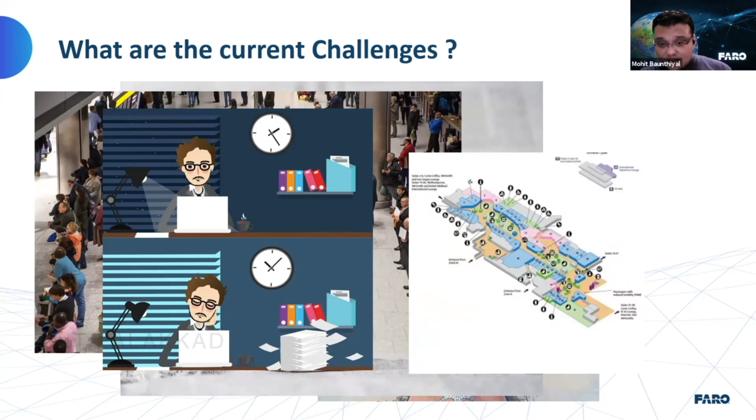Not only that, as I mentioned, the complexity of the site. Usually we had simple buildings in the old times, but nowadays a complex air conditioning system could be there. There can be a water filtration plant. Let's take an example of an airport itself. There could be a terminal building, complex HVAC or ducting going on all around the area. So the complexity of the site is becoming much more challenging in the current construction industry.

The cost of construction waste is one of the big challenges. In fact, we have seen in most cases that 30% of the cost increment of a project is mainly because of construction waste. We have seen areas where the inventory has not been done correctly, and as a result most of the material has been piled up on the site, which can increase construction waste because you don't have any proper documentation of the site.

And whenever you need any element or object from that area, you may be chasing around all the places: where is that part, or where is that component? It can be a beam, some other structural element, or some other feature which may not be correctly inventoried or recorded in the initial time.

Then we have the rework, and I think this is one of the challenges. In the traditional or conventional method, we used to do the initial survey by tape measurements, or with some raw or sketchy drawings of the site. Then based on those measurements, we used to convert it into a 3D model.

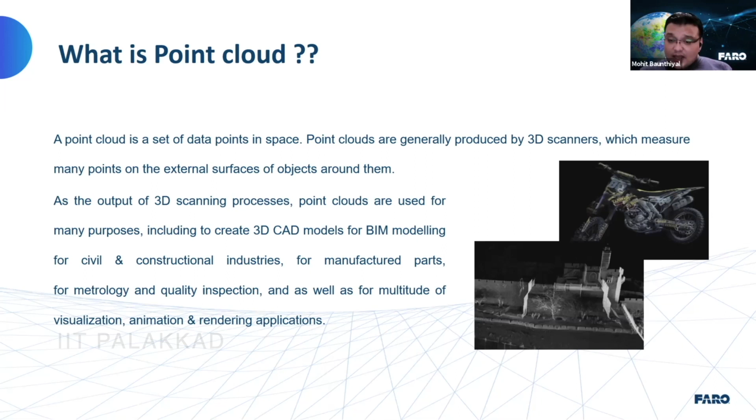So if I talk about the bigger picture, point clouds can be used across all disciplines. We have people from the movie industry, the gaming industry, construction, civil, plant, or oil and gas. So we have various disciplines where this data can be used as per their own requirements.

I have a quick video which I would like to show you, and in this video you can see and relate to the term point cloud data and how a point cloud looks. This video was captured by one of our active users who keeps doing laser scanning on site. Right now on the screen, I think you can see the video. This data has been captured from a heritage site where they wanted to document the complete site information with the help of a laser scanner.

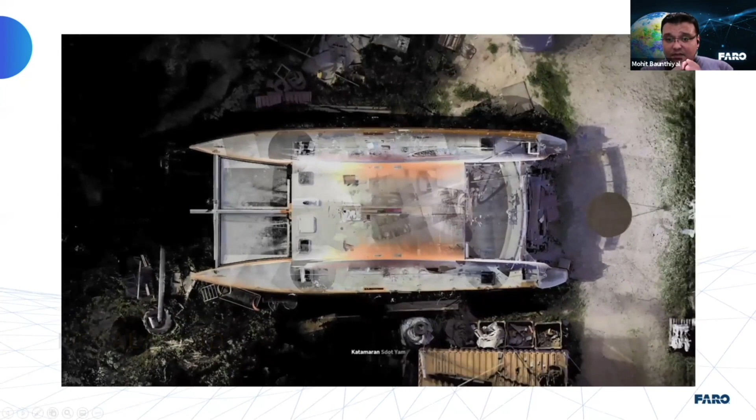They have been scanning not only in the construction environment, but also in forests, on a rail track or a rail station. They have been scanning tunnels to extract the tunnel profile, using the scanner to capture mosaics or paintings, building spaces. We also have plants, heritage, foods. So all this data which you are seeing on the screen is nothing but millions of points captured from the site, which have been stitched together to make a complete 3D geometry.

So right now you can see we have cases from the police department, like a burned bus or maybe an accident scenario. We have piping. The complete piping can be scanned with the help of the device, so if you want to make a complete as-built piping for, let's say, your buildings, your plant, or maybe the interior of a ship as well.

So we can also use the same laser scanning technology, and that can collect all this point cloud data from the site, and later on it can be used for 3D modeling, reverse engineering, QA/QC, and even for the visual representation or for the digitalization of the data itself.

So the scanning or the point cloud can be of a small component or a small object, and it can even be up to a large area such as a complete city, where you can do the scanning with the help of these devices. So I hope this video helps you to understand the term point cloud data and how it actually looks on the site itself.

So before proceeding to my next slide, I believe the point cloud may have given you a clear idea of what exactly point clouds are. And now, as I mentioned, the point cloud data has been captured with the help of a 3D laser scanner. So the next question could be, okay, what exactly is a 3D laser scanner?

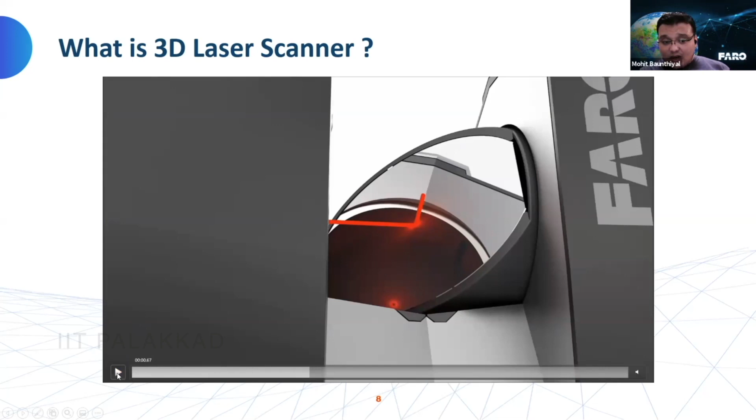The moment we start scanning, the laser starts emitting and strikes the mirror head, which is situated at the center of the scanner. Once it strikes the mirror head, it starts reflecting outwards to capture the surroundings. Now, the moment it hits the surface, it comes back and collects the XYZ information.

It's actually similar to what we have seen with other devices, like a distance meter, where you take out a distance meter, strike a point on the surface, and it shows you the distance between the object and the position where you are standing. Similar to that, we have the same technology. The same laser strikes the surface and comes back to the scanner along with the XYZ as well as the color information.

But the major comparison between both technologies is that with a distance meter or even with a total station, you are only able to capture a single point at a time, whereas with this device you are capturing nearly 2 million points per second. As you can see, the device is not only emitting the laser in one direction, it's rotating on both axes, horizontally as well as vertically.

And if I talk about the measurement speed of the device, it's a 2 million points per second measurement speed. As a result, the data you capture even with a single scan is going to be enormous compared with the traditional or conventional method. So that's why we keep saying that with laser scanners, we are looking at a fast device to capture the site information. Okay.

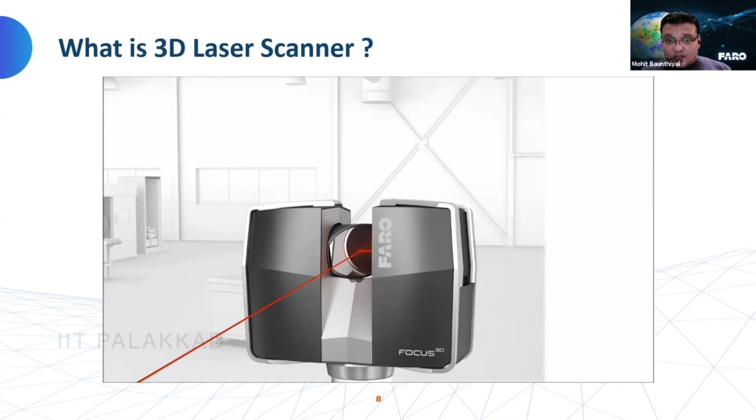And while proceeding with the same, again, there are two different types of laser scanners which are right now available in the market. And in fact, I think one of the common terms which you may have also heard about is LiDAR. So we actually work on the same principle of LiDAR, where a laser source emits a laser, it comes back and collects the information. Now, the only difference is that LiDAR usually works in a single direction. So we do have a beam which can work in a single direction.

Now, it can be a single-beam LiDAR or it can be a multi-beam LiDAR. But when we talk about a laser scanner, a laser scanner can actually do the scanning of the complete 360 environment in one go. So that makes it different. But if I talk about the fundamentals or the technology aspect, they are both actually the same.

When we talk about the time of flight laser scanner, it simply emits a laser, it comes back and collects the information; the time taken for the laser to travel is documented, and as a result, we have calculated the distance. Whereas in the case of phase shift, we are also calculating the medium in which the laser is traveling. And as a result, when it comes back, we have more precise information of the site itself.

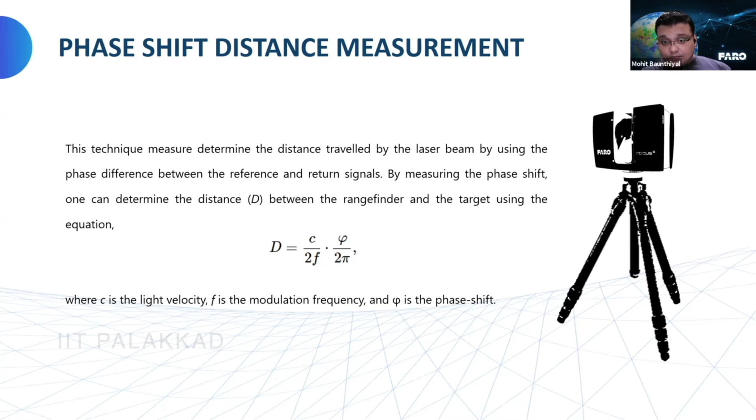Since we have started with the laser scanner, I'll also go quickly through the history of the laser scanner. Laser scanners are actually not new in the industry. Laser scanners started being used somewhere in the 1990s. And I think one of the first founders of this technology is Ben Kacyra. He's from Cyra Technologies, who made the world's first laser scanner.

And after a few years, that scanner was actually made available for the users. At that time, he was mostly using these technologies for documenting large spaces for heritage and even for heritage evaluation. In fact, if you want to read the stories about Ben Kacyra, you can see that earlier he used to do laser scanning development, but now he's totally into heritage and preservation work.

And he's actually one of the founders of the CyArk organization. CyArk is the one who has taken the initiative of scanning 500 heritage monuments across the world. And they have actually done a phenomenal job documenting all of the 500 sites.

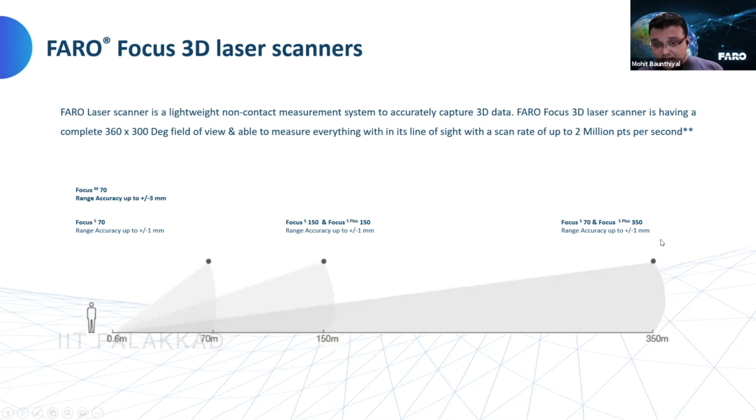We also have a 2D mobile mapping system. Similar to what you may have seen as a distance meter, we have this ScanPlan device, which is basically a 2D mobile mapping system. You just need to hold the device in your hand and start walking around your area or site. The moment you start walking, it starts creating a 2D drawing on the screen, which can be your mobile phone. At the same time, you get a real-time preview of the complete lines, the sketches, or the wall information on the site itself.

Then we have the handheld laser scanner as well. The Faro Freestyle 2 is the handheld laser scanning segment, where you can do close range laser scanning on the site, and the object can be scanned with the help of this handheld device. These devices have their own accuracies and their own objectives. The handheld laser scanner is used in complex environments where a terrestrial or tripod-based scanner cannot be placed. So in those tight spaces, you can do the scanning with this handheld device.

Now, with the handheld device, the accuracy is around 0.5 mm, and it varies according to the distance at which we are capturing the data. The accuracy can be 0.5 mm if I'm standing at a distance of 1 meter. If I stand at a distance of 5 meters, the accuracy goes to around 5 mm. And the maximum capture distance is up to 10 meters, where the accuracy goes up to 15 mm. So depending on my need, I can adjust my distance and ensure my data accuracy accordingly on the site.

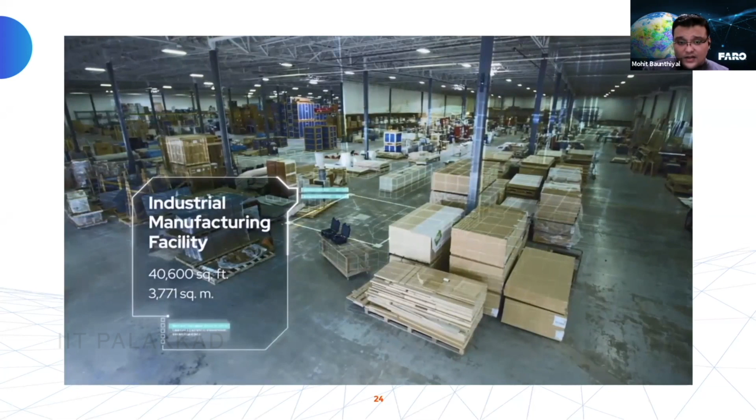I have a quick video in which I would like to show you the workflow of the Swift system. In this case, as you can see, we have this construction, a warehouse or plant, where we have been using the same Swift for capturing the complete data or the complete site information.

Sorry. Now for data capturing, what we simply need to do is plug all our devices into the location where they need to be placed. On the top you have the Focus 3D, below it you have the ScanPlan on top of a tripod, and at the bottom part we have the trolley system.

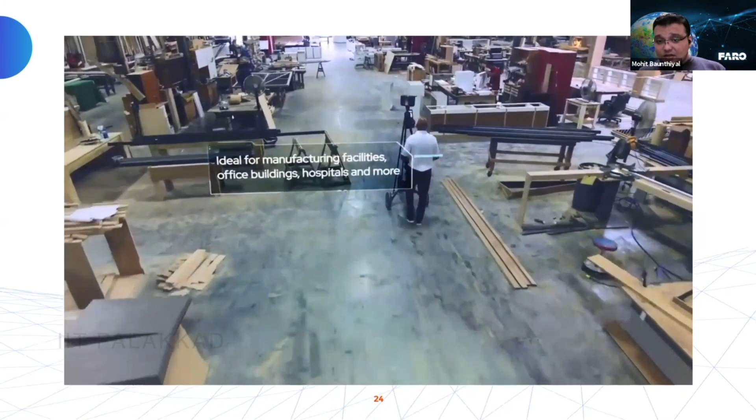The good part is that the FARO Focus Swift system offers you complete freedom of choice. When we say freedom of choice, as I mentioned, if you want quick data capturing, you can do it while moving the cart. If you want high-end accuracy, then you can go for a stationary scan. You can stop your cart and click on the device, so during the mobile scanning itself you can choose the stationary or high-end scan, and the data can be captured accordingly.

Now, to compare with the traditional scanning method, in this part you can see we have done about 24 scans at different positions in the tripod configuration, whereas in this case we are simply moving our trolley all around the area. So for the same site, we have taken about 24 scan positions, and each scan position has taken around 5 minutes.

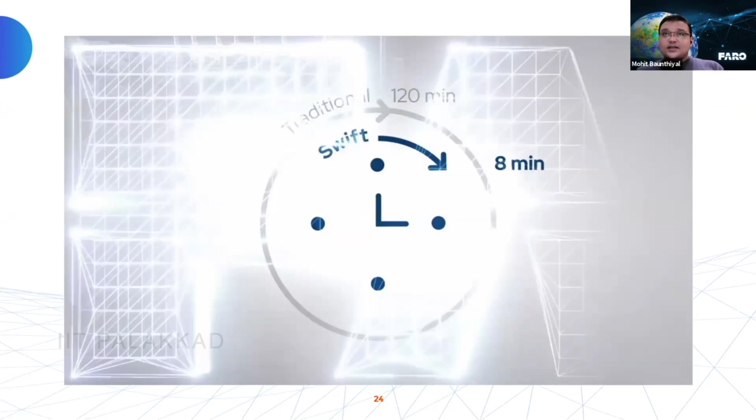In total, with the Swift system we spent about 8 minutes on data capturing, whereas with the traditional scanning system we spent about 120 minutes capturing the site information. So you can see this device is much faster compared with the traditional method. A user can choose at any point which configuration or which accuracy is needed for their project requirement, and use it accordingly at the site itself.

As I mentioned, in the Swift we have the same 3D laser scanner, the Focus S series or S Plus series laser scanner. Along with that, we have a firmware that simply needs to be enabled. All the scanners FARO provides have a Swift configuration, but to enable it, there is a firmware license which needs to be installed inside your scanner. Along with that, we have the ScanPlan and the mount where the ScanPlan is placed, and a mobile phone, which is used as a controller.

Any mobile phone, Android or iPhone, can be used. You are not using any specific app for this. We are simply accessing the Wi-Fi of the devices, and based on that Wi-Fi, we connect our mobile phone to be used as a controller for both of these devices. The good part is that the entire system is wire free. So you don't need to run cables and other things for capturing the data or for connecting with each other.

They all work within the Faro ecosystem, and they can all be interlinked together. In this case, the Focus 3D is connected with ScanPlan via Wi-Fi. At the same time, the user's mobile phone can also be connected with the ScanPlan. And this will keep on collecting the trajectory wherever I'm moving the cart.

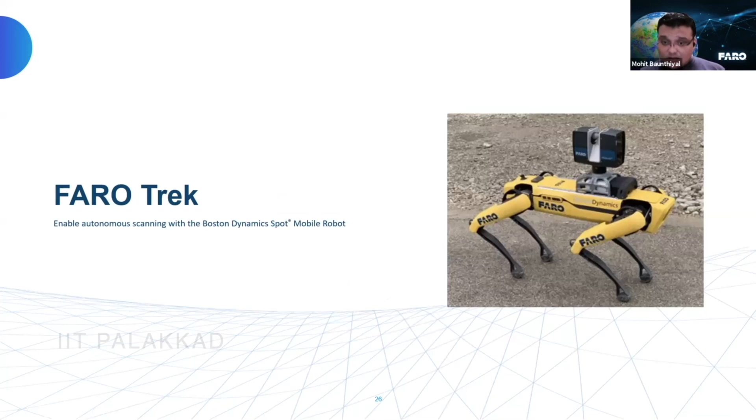The other system which we have is, as I mentioned, an autonomous laser scanning system. In this case, we have this product, the Faro Trek, which is a joint collaboration between Faro and Boston Dynamics. We have combined both of these technologies together, where the Boston Dynamics Spot can give us complete mobility, or the choice of using an autonomous laser scanning platform.

So we just need to feed in, let's say, the flight plan, similar to what we do with a drone, and that's it. Now the device will go to the site, do the data capturing and everything, and come back to us accordingly. Again, this is based on the requirement. If we have large or complex sites where there could be some hazard for the operator, or where human involvement need not be there, in those complex areas this device can go and do the scanning.

Now, the good part is that all the scans have been captured and aligned with respect to the trajectory where the Spot, the robotic platform, is moving. So as a result, we have stitched data, already pre-processed registered data. All the scans are already positioned in the location wherever they need to be.

The good part with the Spot is that it can actually climb stairs. So if there is any change in level, you don't need to shift your device. The Spot is intelligent enough to climb those stairs, reach another level, do the scanning, and then come back to you. So I have a quick video on the Spot as well. Let's have a look at the Spot.

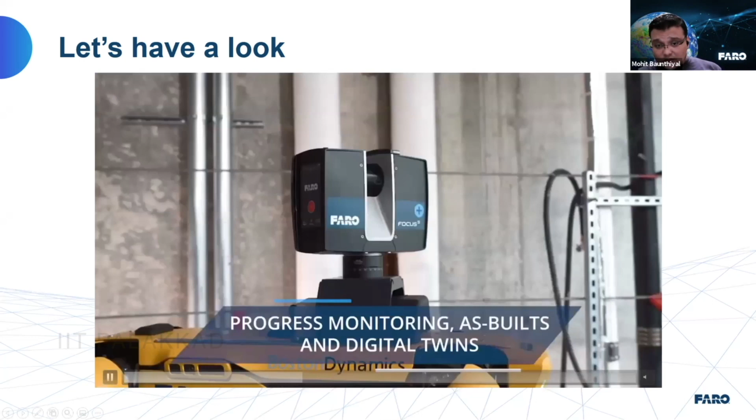So when we talk about the Spot, as you can see, this is the main setup, the main robot. And on top of it, we have the Focus 3D laser scanner, in this case the S Plus, along with a Spot Core. The Core and the scanner are provided by Faro, and the autonomous robotic system is provided by Boston Dynamics itself. So depending on the user's need, we can use it accordingly.

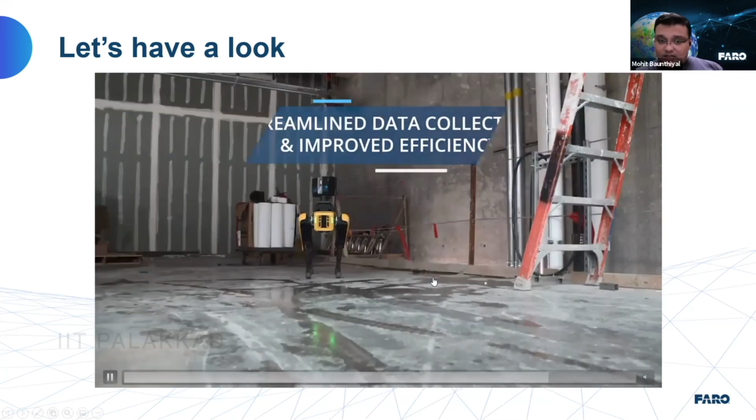Now you can see, if I say I need to scan two different floors, the Spot is intelligent enough. It goes to the site, it stops, and it holds the position where the scan needs to be done. Now you can see the Spot is in a stationary position. It has done the scanning, and now it starts moving to another location. So it's more like a stop-and-go configuration. The device itself goes to the place and starts scanning. Once the scanning is done, it shifts to another location and does the scanning again. And at the end of the day, you have complete pre-positioned, aligned data from the site itself.

So I think somebody has raised a hand. I need to see who exactly he or she is. So is there any question? No, sir. Okay. So we continue. Yeah. Thank you, Nikunj.

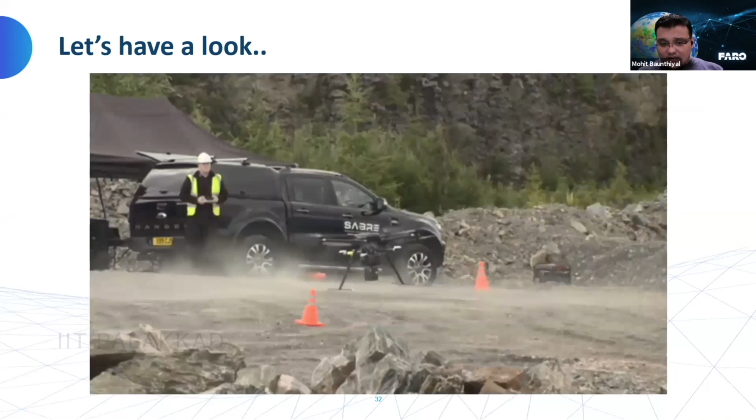so in this video, this is the main setup which has been done. Again, for this part, we have an integrating partner with us, Sabre, who has done the collaboration of both of these technologies. The moment you start flying your drone, you just need to feed in your flight path and everything. And the moment it takes off, it actually starts doing the scanning from the scanner side itself.

So now in this case, they have actually been doing the scanning for an open cast mine. And now you can see the scanner keeps on capturing the data, and it's just taking a walk around the complete site. And we get the complete scanning output once we call back the device. All the scanning data is stored inside your SD card. So you can take out the SD card, process the data in your laptop, and you're good to go with your complete open cast mine data within a single flight.

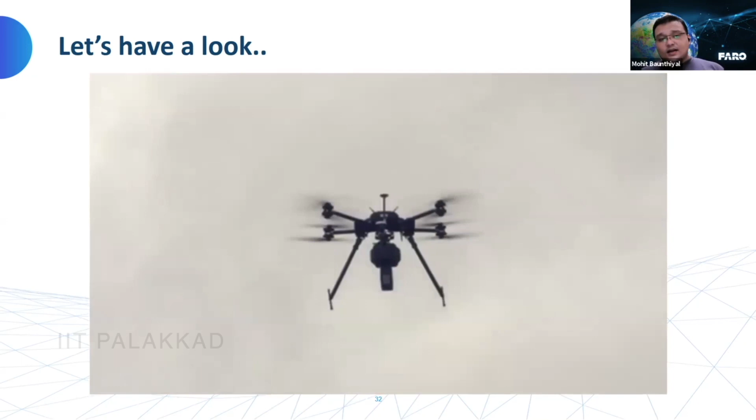Now, this thing can be customized again based on the requirement. If somebody wants color data, an external image capturing camera can be mounted at the bottom of the drone along with the scanner as well. And later on during the processing part, we can actually stitch those images along with my laser scan data. But again, it totally depends on the choice of the user. If you want to use it with color, you can have that additional color option or the color accessories. If you don't want, you can also use it without the color information.

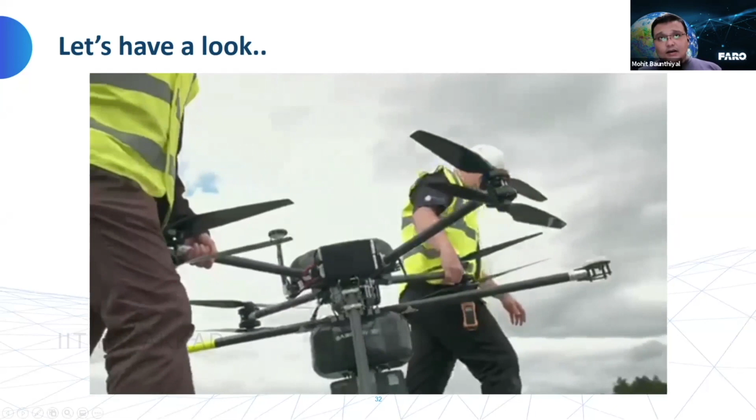Okay. So again, this entire system can give you complete freedom of choice to be used in the aerial configuration mode. The same device can also be used, as I mentioned, on a car. In fact, in my next slide, you can see the same device being used on a car as well. So for this part, if you want to scan a large area, like maybe a city or a town. Nowadays in India, we do have lots of smart city development happening. So the same device can be used for those applications as well.

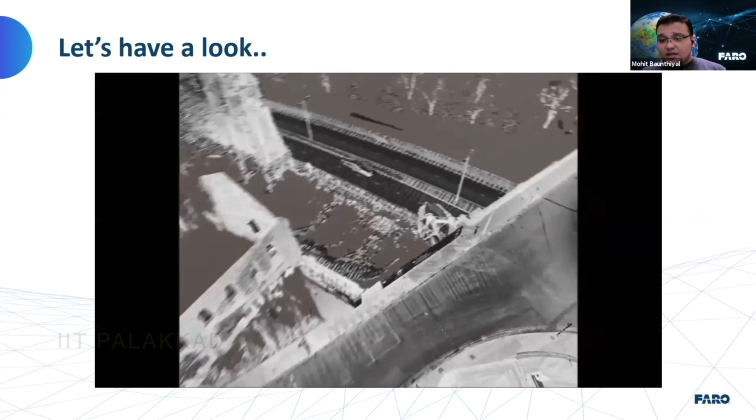In fact, in Asia itself, we have people from construction. We also have people from the police department who are using this car system to understand the areas where most of the accidents keep happening. For example, if there is a specific intersection where an accident happened, they were virtually documenting the site, and later in their office, they look for the root cause, like how many blind spots there are in that particular area, so that they can have better management or better planning at the site itself to make the roads safer for the people.

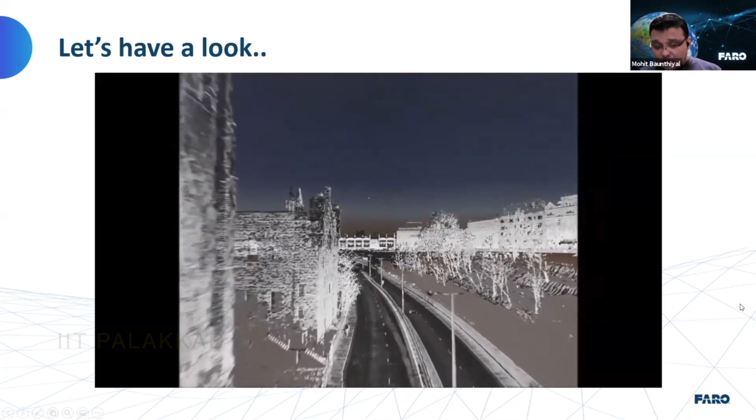Sorry. So the good part is that the scanning can be done in both configurations. What you are seeing right now has not been captured by the aerial system. This has been captured by the car-based system, the vehicle-mounted mobile mapping system, and we are just driving around the street. This is an older device which you're seeing on the screen. This device has a 330-meter range. So all the objects coming within the line of sight of 330 meters, we are able to capture all that information, all those features accordingly.

If you see the data, from the road perspective, we are not only getting all the road information like the center line, the medians, the markings and everything, but also if somebody wants to go for the street poles, how many street poles we have, where the dividers and medians are, even the bridge height for the road clearance, they can all be captured and evaluated accordingly.

So if tomorrow somebody wants to go for the floor flatness of some particular area, or even for this road, we can actually see the levelness or the flatness. So all sorts of corrections and construction needs can be fulfilled with the help of this laser scan data, whether it is captured by a terrestrial scanner or by this mobile mapping system from the site itself.

Again, in this case, we also have the same freedom of choice. So a user can choose between color and black and white. Usually in road cases, we don't need the color information, so in this you have not seen the color information.

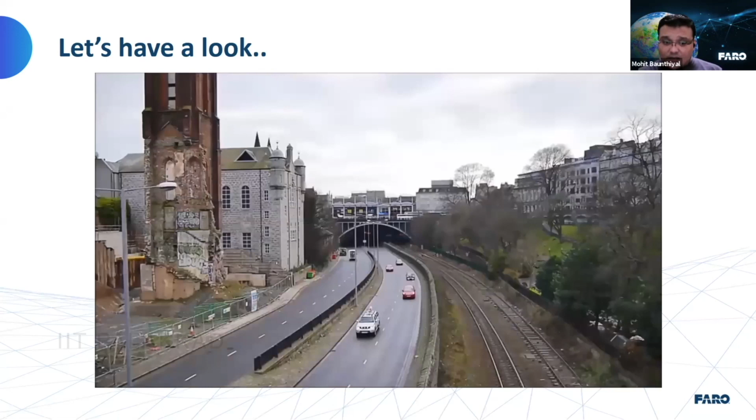But if you want, we do have a boom lift, which can be mounted at the top of the same scanning system. That boom lift is going to capture images from multiple directions. It has around 6 or 8 camera arrangements on the top, and it's going to click images from all sides. Later, during processing, we stitch those images together with our scan data.

Okay. So I think these are some of our solutions which we have available right now for the industry. Now I will quickly go through some of the sample data sets captured by the devices. This is one example where one of my colleagues, who is based in the UK, has done the scanning of this church.

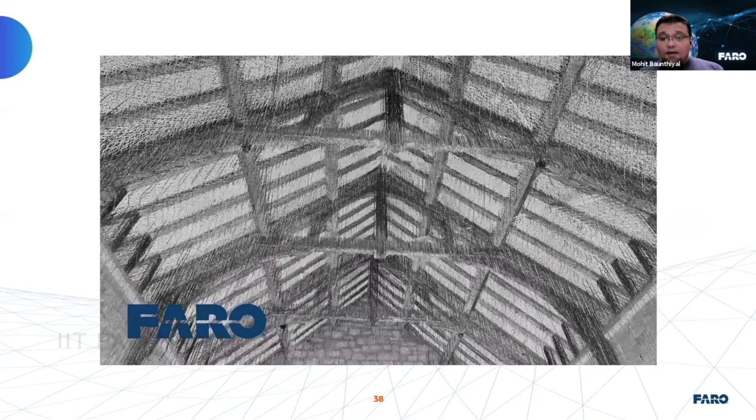Okay, so from this data itself, we can extract all the information. For example, if you want the arch length, the size of the columns or pillars, or the placement of the chairs for some event planning, they all can be done with the help of this device itself.

And to capture this amount of data, we only spent about 2.5 minutes. Within a 2.5 minute duration, he was able to capture this entire information, which you just have seen in the video, with the help of the FARO Swift mobile mapping system.

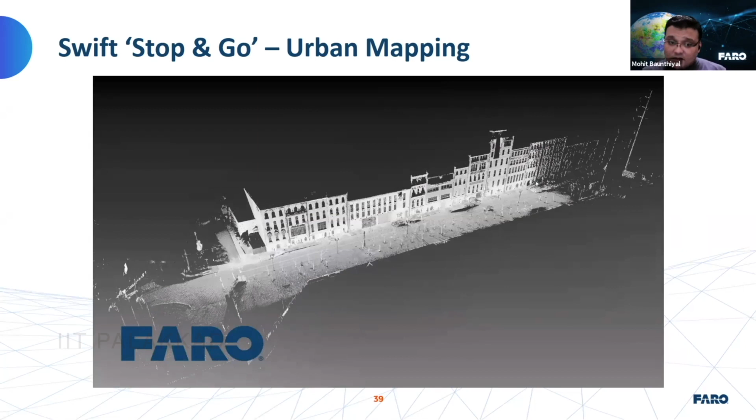In another example, the same FARO Swift system can also be used for the outdoor environment. In the outdoor case, let's say the main objective is to capture not only the road, but also the facade of the buildings. So we took our cart-based system, the FARO Swift, and started moving the cart along the side of this road.

And the amount of data we were able to capture is, as you can see, enormous. If you want to locate the street pole, you can do that. If you want to locate the width of the roads, you can do that. Markings, any detailing even of the buildings, can all be read out from the scan data itself. That makes it more beneficial for the user.

So depending on the project need, if he just wants to create 2D drawings of these roads, he can do that. If they want to make a 3D model, he can also make the 3D models. Even the elevation plan or the facade drawings can be generated from the same scan data.

Now you can see this is the location where we placed the cart, and the cart keeps moving from that end to this end. This is actually a small patch of the entire project; the entire project is more than 4 kilometers of stretches. To capture that 4 kilometer data, he spent around 90 minutes of scan time, and within those 90 minutes he was able to capture the complete 4 kilometer road stretch from the site itself.

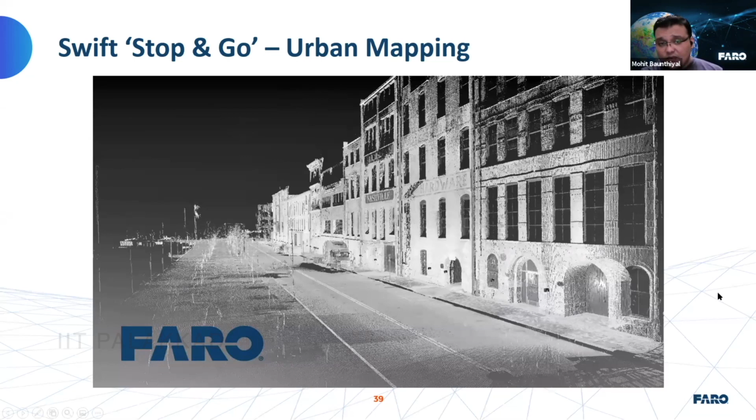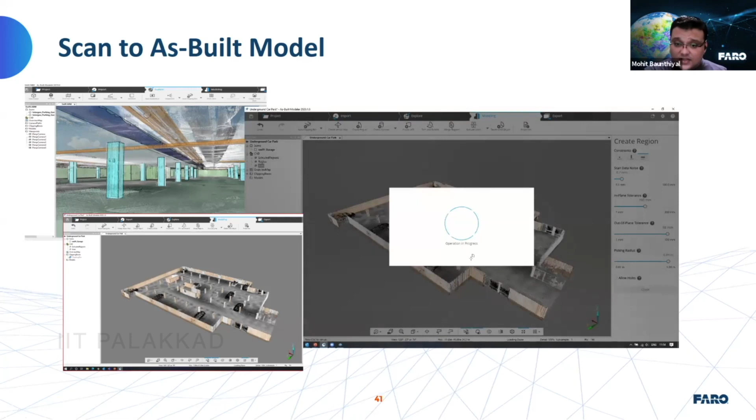The extrusion of the lines helps me extract these walls and the other elements like columns, pillars, and everything from the site itself. So you can see how easy it can be for modeling out the information from the site. Similarly, if you want to create surfaces, we have a region command where you can create or take out the surfaces from the site itself. So the As-Built Modeler is the tool which can help you create a quick 3D model out of your scan data with a few clicks.

In my other slides, I'll show you some real examples from the site of what may cause issues because of wall plumbness or floor flatness. So again, this is one example where we captured the data of the underground car parking with this device. We converted it into a 3D model, and from the same data, we can also do the QA/QC for the construction site itself.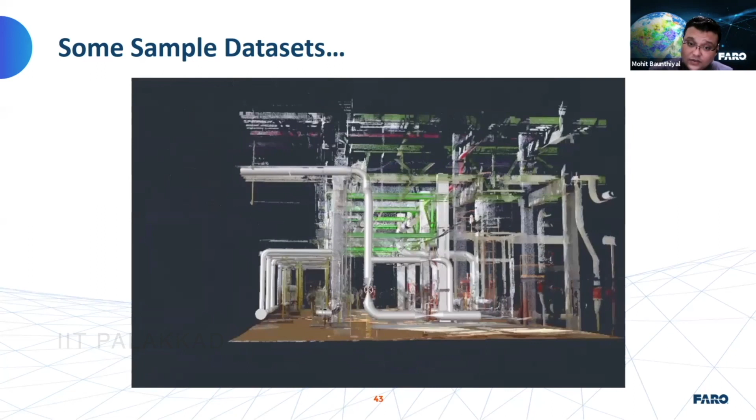So as a result, what we do is go to the site and do the scanning. You can see a little bit of transparency, the transparent points. Those have been captured by the scanner, the Focus 3D scanner. And then inside As-Built for AutoCAD, or As-Built for AutoCAD Plant 3D, we can actually trace out all these pipes in a semi-automated way. We just need to click a point on the pipe, and then the pipe size will be measured and everything can be captured accordingly.

So I think Mr. Rajiv Kumar has raised his hand. So Nikunj, can you unmute him? Yes, sir. Raju, sir. Yeah.

Mr. Mohit, my point goes to the QA and QC role. You see, the effectiveness of a 3D scanner in ensuring the measurement part. Can you highlight that part, like the building heights, building dimensions? Like we have got a building, you move the 3D scanner within the building, so it will take the inner dimensions. Similarly, you have to then take the outer dimensions. You have to move the 3D scanner outside, so then it will be able to generate the entire dimensions of the building.

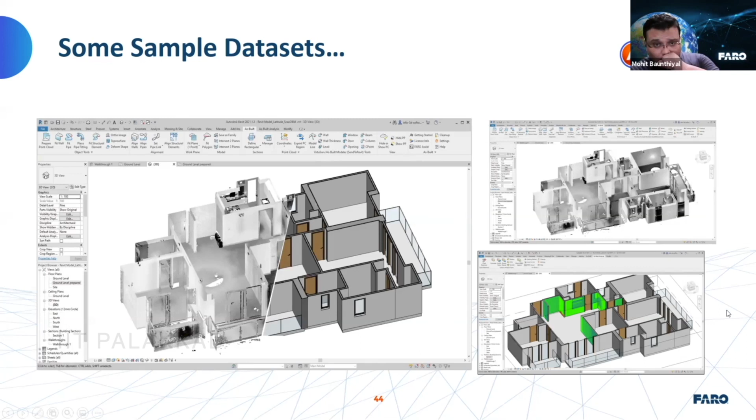Whereas in this example, again, this is one of the facilities. This is our own Faro New Delhi office, where we have scanned an area of about 8,000 square meters, and the entire facility has been scanned. We have done the scanning from the outside of the building, and then from the inside we have the main Faro office. To do the same, we set up our scanner at multiple positions all around the building as well as inside. And in this image, you can see the scan data. Because we have not scanned from the top, the top is open. But from the sides, we have covered most of the areas. And from the inside, only a single floor has been scanned.

Later on, inside as-built for Revit, we have converted it into a 3D model. All the glass and curtain walls have been placed in Revit. We have created the survey walls, meaning all kinds of edges and detailing have been added inside Revit itself. Again, all of this has been done with the help of this laser scan data. I have not visited the site. I have not done any manual measurements. Nothing is needed. I just take some scans and come back to my office.

Now, if the scan data is not visible, we have also captured images with the same scanner. The Focus laser scanner also has provision for capturing images. So we have taken high resolution images, and I can review those images individually in case I want to see some detailing at a particular location. Like in this case, I tried to find out the name written on the building. Opal Genesis is the building name. So all those sorts of details have been added manually inside the software itself.

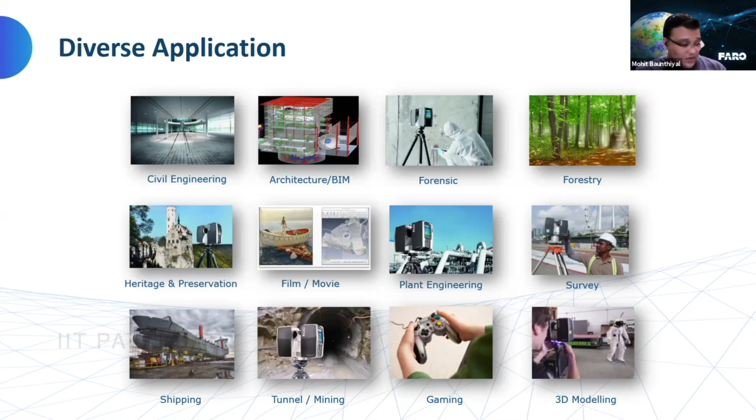Okay. So Nikunj, I just want to confirm that we have some time left with us. Sir, till 11:15. Yeah, till 11:15.

Okay, so I have a quick case study which we have prepared for the construction industry. In fact, this exercise is what we have done with one of the big real estate construction companies based in New Delhi, where we have been doing the complete scan to BIM job, as well as the construction verification, the QA/QC part for them. So the agenda in this case study is introducing the technology, resources we have used, the methods we have followed, the registration workflow, and the construction verification workflow.

So initially, the workflow they were looking for, or what we have offered: we have offered them the Faro Focus S350 laser scanner, and this is needed for doing the documentation part. In fact, as per my experience, the input I got is that in most construction companies, not specifically this client, they have been using various other methods for progressive construction monitoring.

Some of them are using a GoPro camera. They mount it on the helmet and take a quick video. And from those videos, they evaluate how much construction progress has been made on the site. Those sorts of technologies can be useful up to some extent. But if you want to go for dimensional checks or some QA/QC part, those are the areas where they start lacking, or those technologies may not be suitable. So in that case, that's what we have offered.

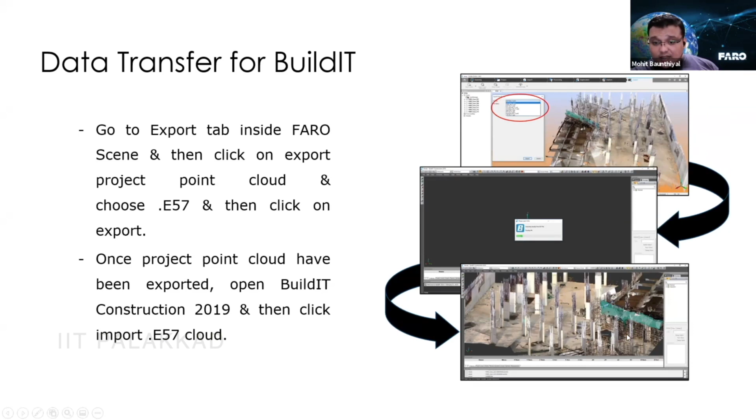In my case, we have been using the same. From FARO SCENE, we bring the data into our BuildIT Construction software. And inside BuildIT Construction, we ran the tests for the QA/QC part. Now, imagine, this is one of the examples where they have a finished flat, somewhere on the 11th floor of the building. And that building is going to be up to 62 to 65 floors.

Now, let's say they have a balcony area where the drain needs to be at this end. But when we did the complete laser scanning of the site, we noticed that the flow of the balcony is actually towards the opposite end. So again, this is not the final balcony.

So based on this, they get an input and they are able to treat or rectify this issue so that water seepage and other issues will not be there at the final delivery of the project. So as a result, in the initial stage itself, they can rectify and shift the flow of the water, or the flatness of the floor can be rectified in the initial stage itself. Similarly, we have wall plumbness as well.

So instead of using a plumb bob like the old method, or the water tube leveling, what they can do, like for this building facade itself, from the ground it may look like it's completely straight or completely plumb, but when we analyzed the data, we saw that this area is having too much distortion.

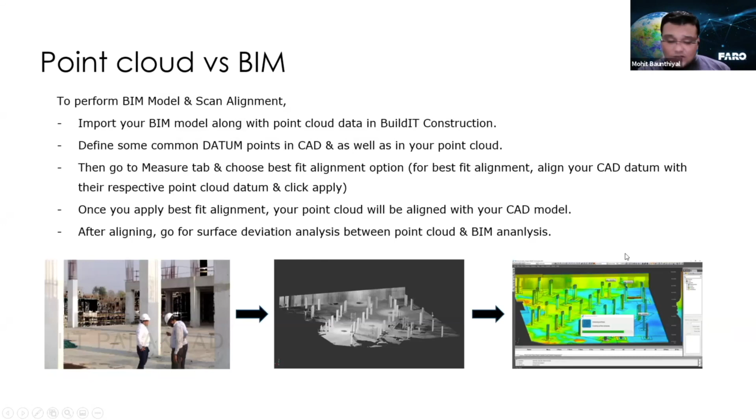And the red areas you can see are the debris which has formed on the surface, which may be removed after the finalization of the project. So again, this can be a quick tool for getting the complete construction progress monitored, and you can keep an eye on it.

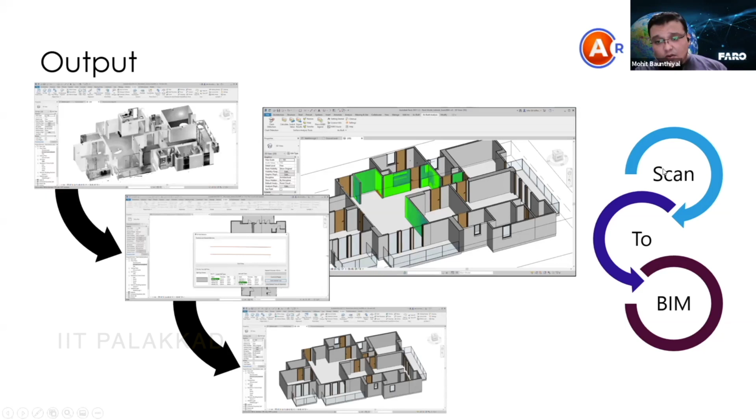Okay. So now it's an easier job for you to compare or to convert it from scan to BIM model. Similarly, we have done this exercise for them as well. For one of their studio flats, they have a multi-story studio flat with 4 floors. From the bottom floor, where the lift needs to be installed, we have taken a scan, and these 4 floors have been scanned with the help of FARO laser scan data.

Now you can see we can measure the gate size, and we can also ensure whether the shaft is completely plumbed or not, so that tomorrow when the lift cart needs to be installed, the cart will not be colliding with the surfaces, and they can do the installation of the lift within the time period without any delays. Before doing the installation, they can run the simulation inside the software itself and see what the high points and low points are, which can affect the shaft or not.

They can also define the tolerance, and they can have this sort of report where they can see the surface deviation analysis and the values for each and every point. If I want to annotate points which are beyond the tolerance, we can also do that. All those points will be marked out like this, and we get a complete brief report for those specific points as well.

And last but not the least, in this case you can see we have also done the annotation. The out points and the in points we have marked out on the drawing itself. In this one, we only see the major issues with the debris itself, but the rest of the data is within their tolerance level. And in this one, as I mentioned, this is for the balcony area where the floor flatness needs to be done, and we have done it with this. And then the wall plumbness example.

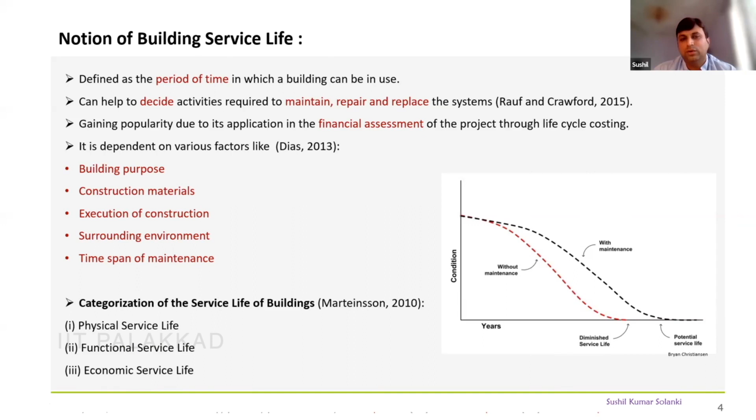Service life prediction has various models. We could have scientific models like deterministic models, factor models, engineering models, and all. And we have very good research on all those models, n number of journals and papers by which we can understand the linear regression model or multiple regression analysis for the identification of the service life.

But the biggest problem we are facing nowadays is getting this kind of data, identifying that particular building structure, and then collecting the data. Because the moment you go for a building rehabilitation project, collecting data from the building is very difficult. As an architect, I can tell you that in rehabilitation projects we could not find the drawings which were designed, constructed and executed in the building earlier. So extracting that kind of information is very, very difficult.

And if you cannot find the data, these models will not work properly. Certainly, if you have data and feed it into these models, it gives you very realistic results. So many times we use factor methods, because though it is superficial and doesn't give very detailed calculated results, that is what we generally go for.

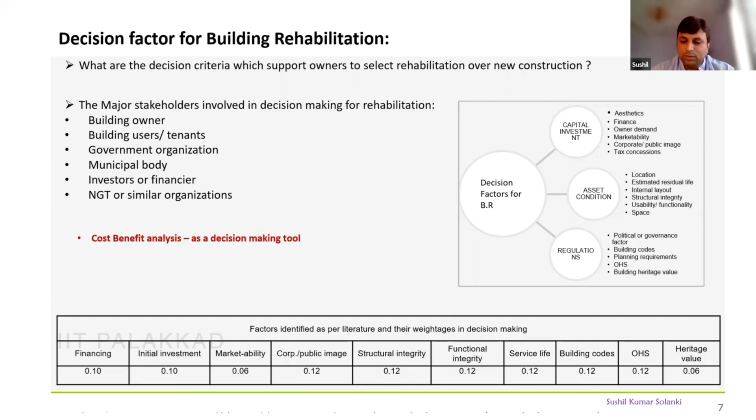Because now money matters. I mean, every time you put money into any project, what would be the return on that? That is what people are mainly worried about. So I'll show one case of what we have done in one rehabilitation project in New Delhi.

It's the IMA building. The construction period was 1965, and the client came to us in 2009 for rehabilitating the building, because we had not seen the building earlier and had not rehabilitated it before. Before that, the building was under distress, and many seepages were there. The elevation was also outdated, and many problems were there. So in 2009, they requested the rehabilitation project.

The structure is a frame structure. The foundation is an isolated foundation. Number of stories is G+5. Dimension is around 31 by 30 meters. And deterioration was visible at that time. But as I said, visibility can't evaluate the entire distress in the project. So we investigated in great detail. We went for many tests.

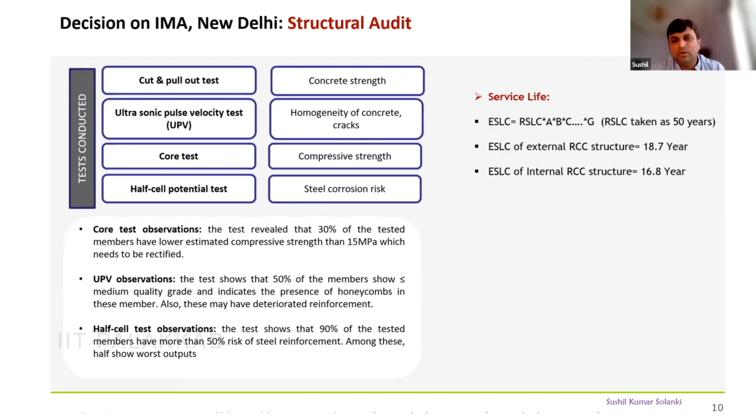So what we did, first of all, we calculated and did a very comprehensive study on that. We tested through various means like non-destructive tests, and we identified that around 16.8, or about 17 years, are left in the service life of that building. That means if we cannot rehabilitate it at a larger level, we can only retain it for the next 15 or 16 years, and that doesn't give us a true picture that during operation it will not fall down or the internal structure will not collapse.

So we adopted BIM and Revit on that particular project. We created the existing model in BIM, and each and every component, each and every structure, we designed on Revit. Internal HVAC components, everything we were making on Revit.

On the contrary, we also designed the newer one: what could be the potential future project by adopting the newer IS codes, newer building bylaws, and the newer FAR we are getting. And then we compared both models, so we could give the entire data to the client on which will benefit them and which will benefit the environment.

So we started taking the direct and indirect costs of rehabilitation, and for the direct cost, BIM was giving us a true picture. Certainly, you cannot get each and everything if you don't have older drawings or older documentation.

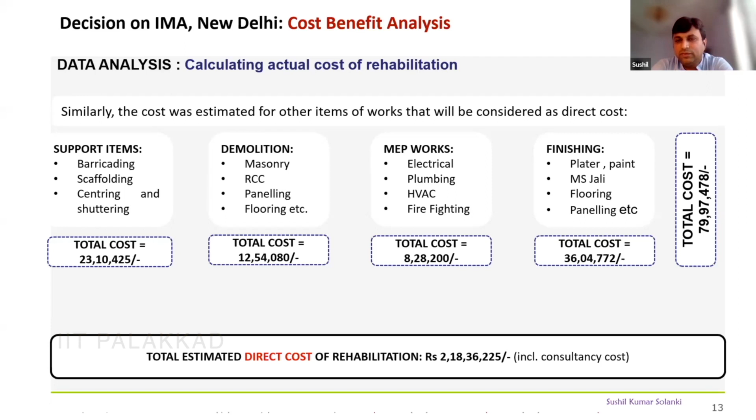Calculating the actual cost of rehabilitation, we were trying to identify that we can rehabilitate it in various parts. If you rehabilitate various parts, one area could be vacant, and one rented space could at that particular time be used for the rehabilitation. So if we rehabilitate the building part-wise, lesser destruction of work could take place. Labor, insurance and site overheads were considered, so indirect cost was also calculated through BIM.

So this is how we have calculated the direct revenue, reduction in O and M, increased value of building, increase in durability and structural value. So larger tangible benefits we were getting through this rehabilitation, and then we were trying to identify the actual cost for that particular building. Around 2.18 crore was the actual treatment cost for the rehabilitation.

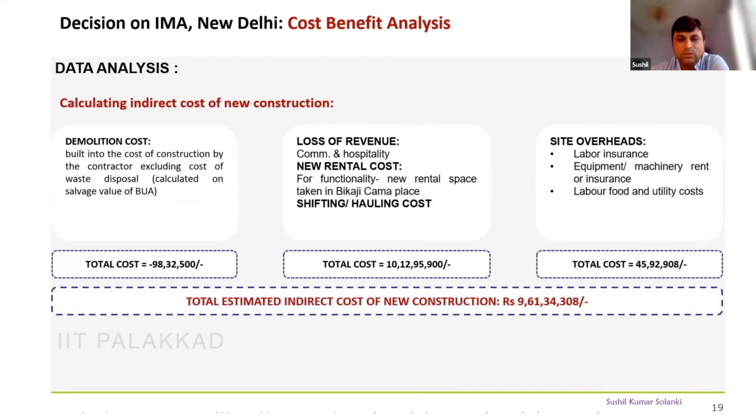So tangible benefits we were getting are increase in rental revenue, reduction in O&M cost, value of building, and risk mitigation. But the data we generated every time was on Revit. Each and everything we have calculated minutely. Each and every service we have calculated minutely. We have not assumed anything unnecessary.

NPV, the net present value, we were getting higher in the rehabilitation also, rather than in going for the newer construction. IRR, certainly the rate of return is higher in the rehabilitation project, because the moment you rehabilitate it and then increase your rent over there, revenue will be on the higher level, and then certainly you will be getting a good amount of that. 203% of IRR and 1.35 years of payback period will always be benefiting you. That's how we actually convinced our client for the rehabilitation of that particular building.

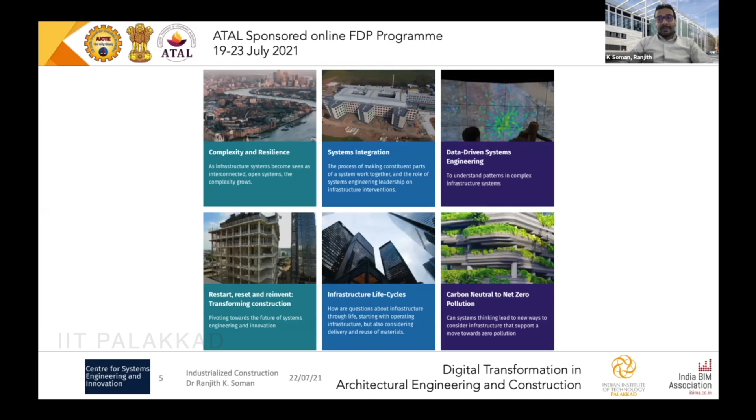Also, before going into the presentation, I would like to give my acknowledgement to Professor Jennifer Whyte, who was also my PhD supervisor, and Professor Daniel Hall, Assistant Professor of Innovative and Industrial Construction at ETH Zurich. I have borrowed a lot and learned a lot from these two professors' presentations and interactions with them.

I would also like to give my thanks to Laing O'Rourke and Mace, two big construction contractors in the UK who have industrialized construction factories. Also to Bryden Wood, a consultant who has done a lot of work on industrialized construction in the realm of digital construction. Soilbuild Construction Group in Singapore, whose workflows I learned a lot from.

Then the Industrialized Construction Forum, an industry-academic collaboration led by Stanford University, with annual forums where industry shares best practices, interacts with academics, and forms a joint agenda. Then last, Transforming Construction Network Plus, an industry-academic initiative within the UK, spearheaded by the UK government.

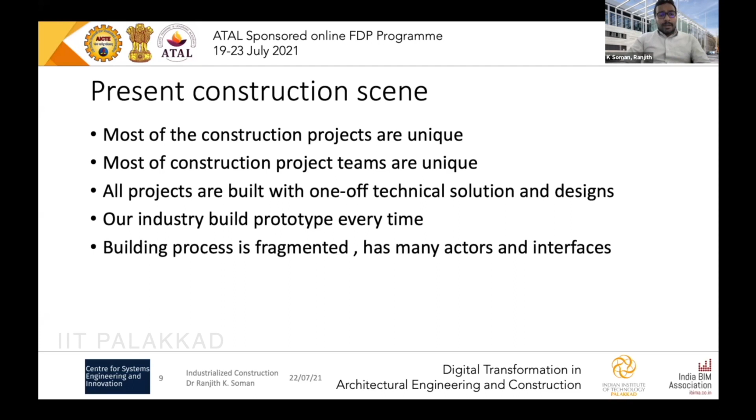So can we remove it? That's the first question. Going on to the second question. I'll be listing out some points. Have we got healthy working conditions in the construction sector? I would say not, because if you look at the statistics, 1 in 5 deaths among US workers is in the construction industry, of which falls account for around 33% of construction deaths.

And what they've told us is, if you could eliminate the falls, you could actually save more than 300 lives every year. Further, the injury rates in construction are around 71% higher than injury rates across all industries on average. And with respect to safety rating, I think we are the second worst among all the sectors, next to agriculture and marine sector, if I'm not wrong.

Secondly, are we sustainable? Is the current process sustainable? The construction sector accounts for around 39% of carbon dioxide emissions in the world. And in past research, it has been seen that industrialized construction methods have proven to reduce these greenhouse gases by reducing the waste, reducing equipment usage, improving the reusability of components, etc. So that's my second motivation for this talk, which is industrialized construction.

Next, do we have good coordination and a safety first approach? Do we have an effective supply chain? Or do we have a high performing production facility? That means, can we build the buildings at higher productivity with less waste every time? There might be some outlier projects which are really good in productivity, etc., and those are marketed. But are we having that across the construction sector?

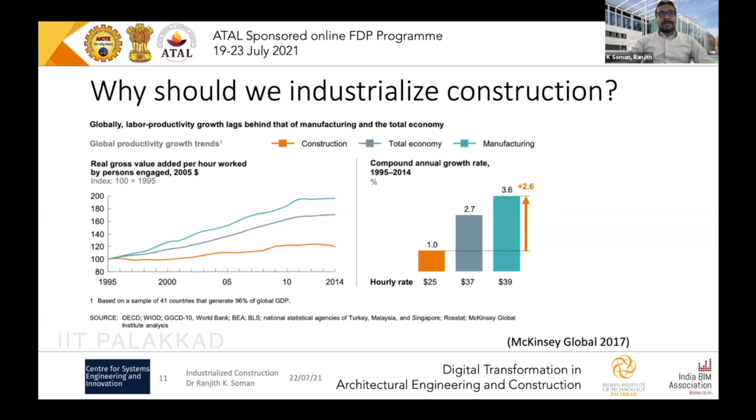And you would know that India is one of those countries where there is a lot of infrastructure being constructed when compared to other countries. If you look at the UK, there would be 1 or 2 mega projects at the time that we are speaking now, which is High Speed 2 and probably Crossrail, which is already delayed, and the Tideway. Whereas in India, you can see a lot of metro construction projects, a lot of large projects coming in, and a lot of small residential projects being constructed. So if you could actually transform our construction from a little bit underperforming to outperformer, we would have a really good impact.

So the reasons for industrializing construction are poor productivity, the low quality, and a complex production environment. We are dealing with a lot of stakeholders, a lot of subcontractors, a lot of fragmentation in terms of design, construction, and operation. Within the design itself, there are multiple teams like architecture, structural design, MEP, etc.

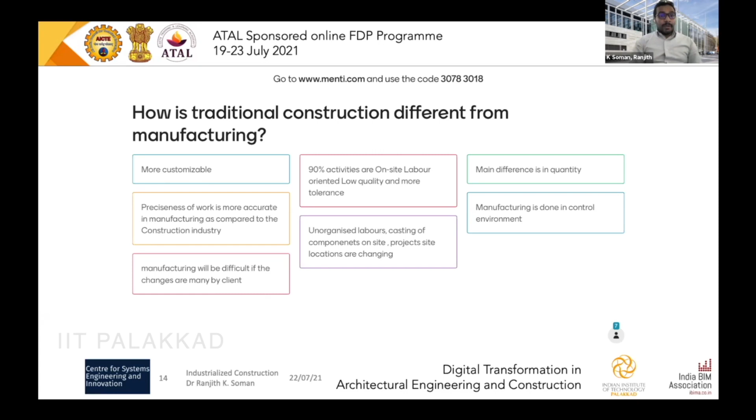Manufacturing will be difficult if changes are made by the client. I think we'll be dealing with that question a bit later on, but that is true again. We are facing a lot of change orders in the construction sector. So these are really good answers, which takes us to the next part of the presentation: can industrialized construction help while retaining all the positives of traditional construction but eliminating all the negatives? For that, we need to think a little about manufacturing paradigms. When we talk about manufacturing, we always think about manufacturing as it is now, which is what we have seen in some of the comparisons in the last slide.

But what I would like to know is about craft production in the start. So this was manufacturing before the assembly lines. So it was all a matter of a highly skilled workforce, and artisans were the source of pride; they really took pride in manufacturing or creating that particular component. Just think about Rolex watches or Rolls Royces, where they do everything by hand, and they have a source of pride in that craftsmanship.

And one of the things is they don't use specialized tools, they use general purpose tools. So it's like a common toolkit for everything. Whereas in mass production, it's a specific tool for everything. The final product is mostly unique and it's catered to the client's needs. And it requires a long process of custom fitting. That means you're doing everything in a custom fashion, just like what you were saying earlier, that in construction everything is customized. Similarly, during the craft production stage, everything was custom fitted.

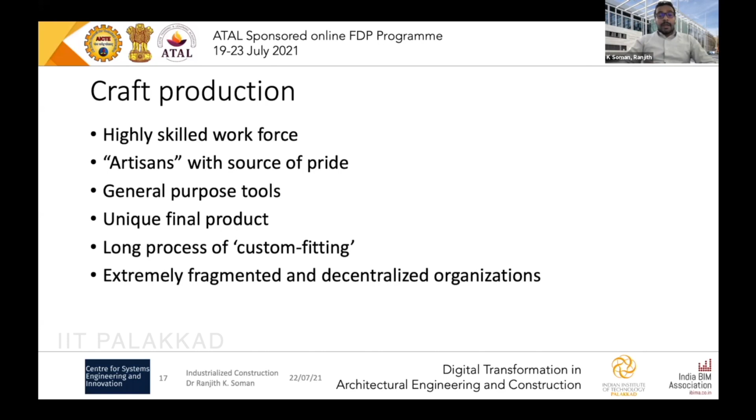So what changed manufacturing was this idea of mass production, where they were creating a standard product for everyone. And I would like to show this quote from Henry Ford from his book, My Life and Work: any customer can have a car painted any color that he wants, as long as it is black. That means you're not doing any customization. You're just thinking about throughput, producing the maximum amount of commodity at the lowest price, so that you could deliver it to the customer with the highest value. But you lack the element of customization there. So production changed from craft production first into mass production. But it didn't stop there.

So I just want to know your opinion on why did mass production succeed? If you look at that Mentimeter, you could enter three words onto it. So we'll see why you think mass production succeeded. I'm assuming you all could get into the Mentimeter. I'll wait around a minute. You might have to refresh your Mentimeter page for this question to load. Okay, we're getting answers now.

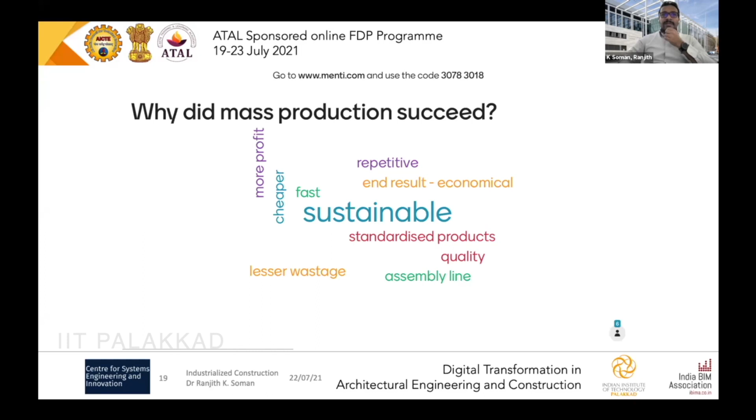So that's assembly line, sustainable, cheaper, quality, lesser wastage. So why did mass production achieve these things? End result, economical, quality, good. It's fast, definitely it is fast. So how did it make it fast? More profit, repetitive, true. Any more coming in? I think all of these are really good answers in terms of why mass production succeeded. Better quality control, huge quantity can be produced. Yes, great. These are really good answers, and all are correct answers in a way.

So there was a study by Womack and Jones in 1990 studying exactly this idea: why did mass production succeed? Assembly line is one of the main factors. Higher numbers that we can produce is a good factor. But what came down to really good success factors was interchangeability. So when there is a problem within the production line, they need not stop the line. They could interchange it with a like component. Then there is simplicity in assembly. So it's not too complex to assemble, and you don't need a really high specialist for every assembly.

The third was ease of attachment. And this is what helped to actually build the product faster. And even if there are problems with the line, you could just change it with other parts and it would get into the product really fast. So all of these three things are what made assembly lines and mass production a success. And if you look at some of these things, we could see that we could bring customization into the picture because there are interchangeable components.

The attachments are easy and there is a simplicity in the whole process itself. So that's what was done later in manufacturing, especially with the Toyota production system. What they tried is to remove errors from the system. They were improving the flow of the construction process with just-in-time production, so less inventory. Most of the processes were standardized. There was stability in the production line. This led to highest quality, lowest cost, and shortest lead time.

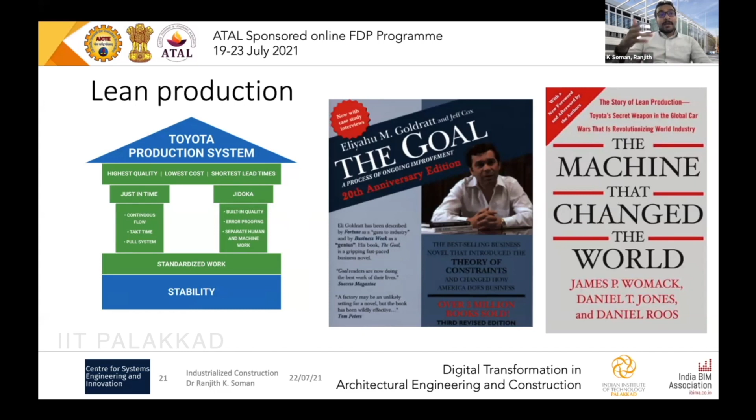So all of this, we are looking at from the automotive sector. But what we have seen is the automotive sector in the era of craft production was just like construction, what we are seeing now. But they've improved over the years. And that's why the productivity of the sector has doubled in the last 25 years. Now, still, we have not achieved mass customization. It is like better products coming out of the automotive sector.

That's where we brought in lean production again. There, what happens is you can have higher variety of products. A lot of automation came in, lesser labor, lesser inventory, and lesser rework. So we have high volume production. Also, there was higher variety. Because the parts can be interchanged, there was better production variety coming.

So it is not like if you want a color in a car, that should be black. That was Henry Ford's idea. Now you could bring in more colors, more customization, better interiors, change of tires, etc. So all of those came in with progressiveness and lean production within the Toyota production system.

Then came the newer idea about customization. That is when there was a little bit of idea about standardization of parts, and interchangeable parts coming in. So the customer could place an order of a particular type of customized car, which would be on the platform of a big car. Let's take the case of a particular Toyota, let's say a Toyota Innova, for instance.

So we could order it in a particular color. We could order it with a particular engine size. We could order it in diesel or petrol. We could order it as automatic or manual transmission. We could have higher quality interiors or low quality interiors, like leather or other ones. We could have different colors. We could have accessories on it. And all of this goes into the same production process, and you come out with that customized car.

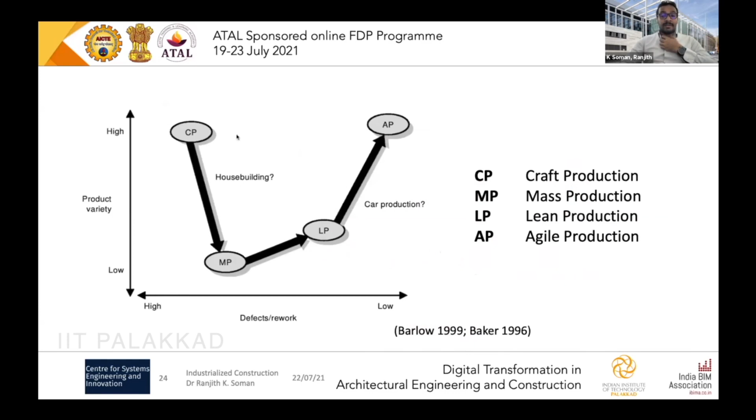So if you look at how manufacturing has moved, it is from craft production to mass production, then to lean production, then to agile production. But in house building or construction, we are still at this particular phase. Now, a second comparison, because in the automotive sector, the product is really small. We're just thinking, is construction different?

So let us take the case of an airline, in which a big structure is being manufactured in a production facility. The assembly line is not actually moving because it's all assembled. People are coming to where we are doing the assembly. All of those things are coming in the aircraft sector, and they have also adopted this idea about agile production.

And what we have seen in the airline sector is there are around 6 million parts in an A380 that's being manufactured, coming from all around the world, manufactured at different places and being assembled. So can we take the same question to a building?

So how many parts do you think are there in a building which is around 7 floors tall, 420 rooms, 40,000 square metres, residential or a hotel building? Just go to menti.com and you could key in the answer.

So we're looking at, there's one answer on 1 billion, 10,000 to 100,000, 100,000 to 1 million, more people towards 100,000 to 1 million parts. There's no correct answer, again, I'm telling. I'm just getting a perception.

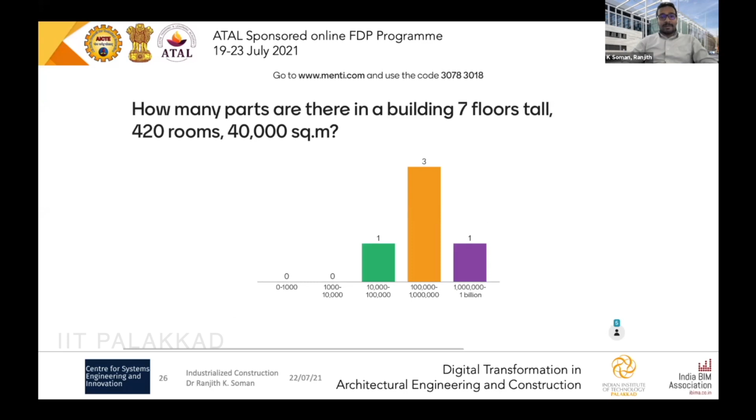Okay, more on that 100,000 to 1 million kind of phase. Okay, let's move on. So some of you have told your idea about how many parts are there in a building. So how do you define a part then? Just your perspective. Again, there is no correct answer to it. I'm just getting an idea about why you chose a particular answer.

Monica Srivastava has her hand up. Does she have any question? Please unmute and... I'm unable to see the Zoom screen on my computer. That's why I'm just asking you to unmute and probably ask a question. Yes, hi. I already said to her to unmute. No, I'm not able to see her hand, so the query is resolved. Okay, great.

Yeah. So basically, components, slab, beam, column, divided spaces, one single piece of construction like a brick. I think all of those are true. So we could think about it in different ways. If you're looking at a column, is a column a single piece or is the rebar inside that a part? So a lot of things are ambiguous in questions like that.

So we could ask, is it an object installed as one piece? Is it at the logic level, at which a piece of design or object is irreducible and unique, just like a rebar, for instance? Or is it a combination of systems that work together to provide a function, like somebody had said about divided spaces previously? So these are all true answers. But what we have seen is, in our sector, we don't have a uniform definition for a part. So that's kind of the takeaway.

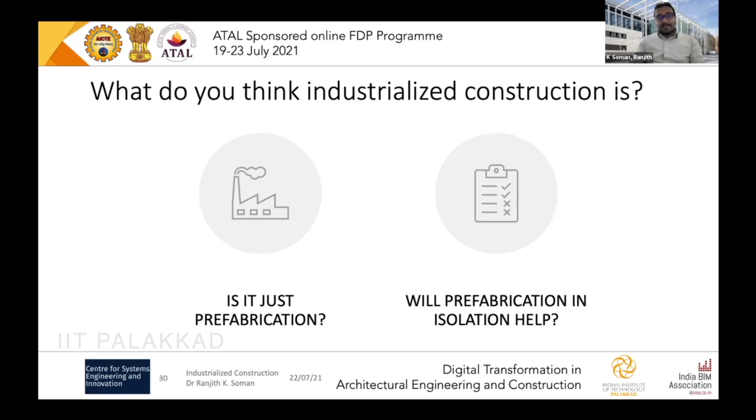So there was an idea about industrialized housing, which later became industrialized construction, developed by a researcher at Stanford called Jerker Lessing, and his idea is around six parts of industrialized construction, and a seventh part on continuous improvement.

Yeah, so the first thing in industrialized construction is we need to have technical systems. Technical systems are essentially the parts that could actually be interchanged, which could be connected with different sets of things. For instance, think of a washing machine. It is a part in itself, right? But it has interfaces. It needs to connect to the right power supply. It needs to connect to the water supply. It needs to connect to the drainage.

You have different kinds of parts, but all you need to standardize is maybe the size of the washing machine, if it has to go into a cupboard in the kitchen. The power supply should be standardized, and the water drainage and water supply should be standardized. And if you look at the kitchen per se, where the washing machine is being put, that kitchen should have a provision for all of these connections, and a place for the washing machine to go in. So the washing machine is a technical system, the kitchen is a technical system, and these two technical systems will work together. So that's the first thing that we need in industrialized construction.

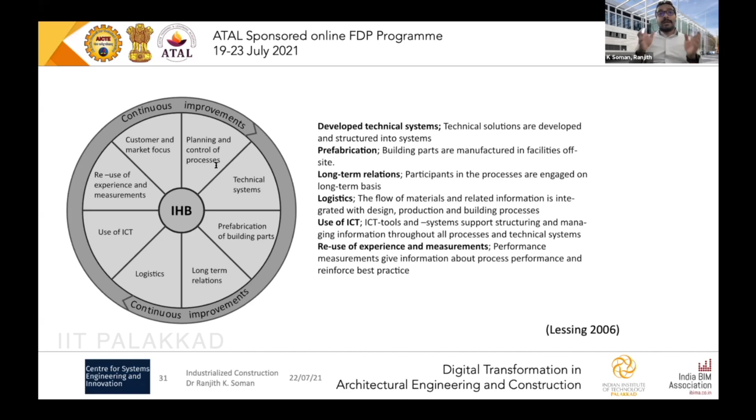One of the things I missed out is the planning and control of process. We also need to think about how these things are planned out and how the production is controlled. It's not one building alone. We're thinking about this planning and production as a process platform where it could be reapplied into every project. Every project would have a standard set of processes. That could be transferred, and you might learn something from one process that could go on to the next, etc. So we could reuse the experience from a previous project onto a new one. And it's not just transferred along with somebody working in the project, it's also along the process itself. The process gets improved. So it's a company-wide transfer.

Then we have a customer and market focus. That's basic because we create the value for the customer. So we should think about what they want and develop the systems and processes around it. And finally, continuous improvement. All of these things should be systematically improved.

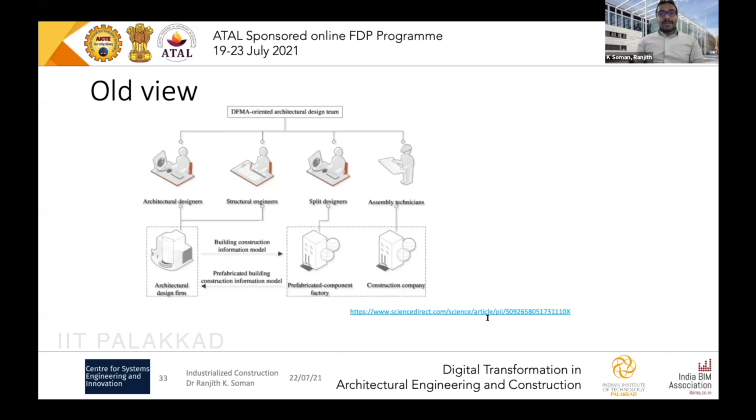Coming to industrialized construction's first view, initially what people were thinking was they would have a standard structure where all these manufactured components would go in. This was first seen in Japan, and that was the first view. Then when customization came, people would design a building as traditional construction. Then there were split designers who were splitting that design into different prefabricated components, which then led to the factory. And there were assembly technicians who were thinking about bringing it together. So the first part here is just like traditional construction, and this was going on to the other one. But over the years, what we found out was this was not really effective.

Now what's happening in industrialized construction is the idea about platforms. So just like what we have told earlier about industrialized construction, you will have a lot of components that could be of different things. And they could be manufactured by different people, but there's a little bit of standardization on how those components connect with each other. And then that would define standardized interfaces. There are standardized manufacturing and assembly processes.

But for this to work, we need to have standard manufacturing procedures. We need to know whether all components are interacting with each other properly, whether they would fit together on the construction site, whether the assembly can happen, etc. So this has led to thinking a lot more about off-site construction.

There's a lot of automation to actually mark the precise points where things would be placed. There are a lot of machine-integrated wearables, because when we start thinking about these components and assemblies coming in, they are going to be really heavy. So you need to help people actually work on this. This is where I talked about specialized tools for manufacturing. When you have exoskeletons and load-bearing mechanisms, we can actually construct really fast without injury to the worker.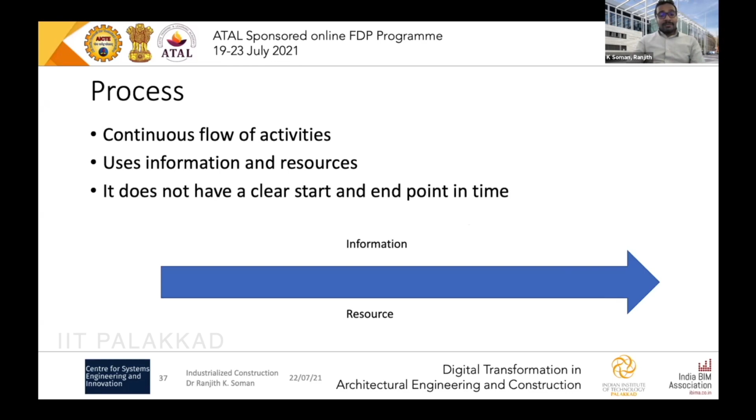And finally, what we need is a platform. A platform could be described as a set of common components, modules, or parts that form a common structure from which unique products can be developed. So multiple products can be built from the same framework. The easiest example I could give is Legos.

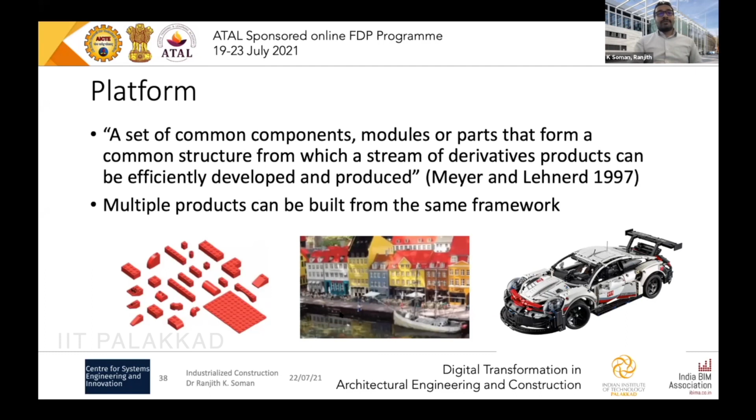Besides cars, if you look at the shipping container, the shape of the shipping container and the anchor points were standardized. Just because of that standardization, the whole shipping process became easier. Most of the ships have the same kind of stacking. The ports have the same kind of lifting things. So the process could remain the same across countries, across languages, across times. And this has been there for a long while.

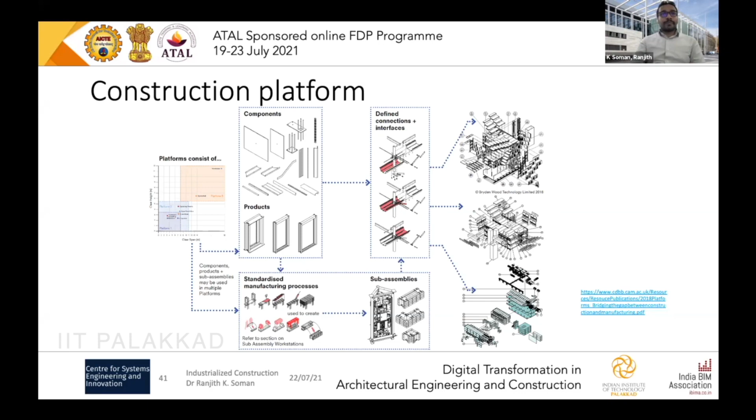Now, what is the advantage? Traditional construction is around here, which is a bespoke or one-at-a-time solution, a simple process, which has low productivity and low manufacturability, whereas there are volumetric things with standard solution and standard process. Here, the uniqueness is not there. Then there are components where it's unique, but it's not mass manufactured. Then there are manufactured platforms, a bespoke solution where we get a unique building using standard process and standard components. So it increases efficiency and effectiveness.

So what do we need in the construction sector to do this? We need to have a set of systems, subsystems and interfaces with standard components, standard interfaces, and standard design and rules. And we need to have a process platform which looks at combining this technical system into a repeatable process across projects to deliver custom products. So that's what we need to think about. And how can digital help it? That's what we will be discussing in the next section.

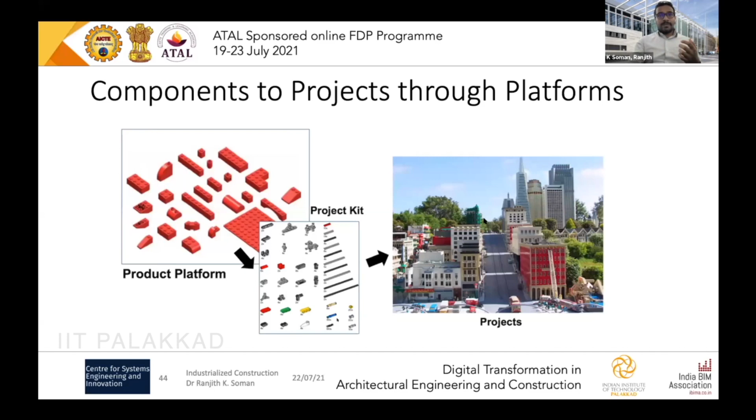So basically we have a standardized set of components, and every project will have a subset from this with required numbers, etc., which is just like a Lego kit, but think about it as a bill of quantities, and it delivers unique projects. So that's what we are doing. There are components. They come together as a sub-assembly. Then it comes together as a unique facility. And it could be residential, manufacturing, or anything.

And the idea is, when you're creating a technical system, we have ideas about it going downstream. So if you are creating a particular thing about a particular dimension, we need to think about how it would be configured, how it would be manufactured, and how it would be assembled. And there's also the idea about rules and constraints going up. So a machine can only manufacture something of a particular dimension.

First, let's say we have a version 1 of the process and technical subsystem platform. We do a project X1, and we learn a lot of things, that some of it is not effective. And by the time a project X2 is also starting, all of this uses the version 1.0 of the technical subsystem and process system.

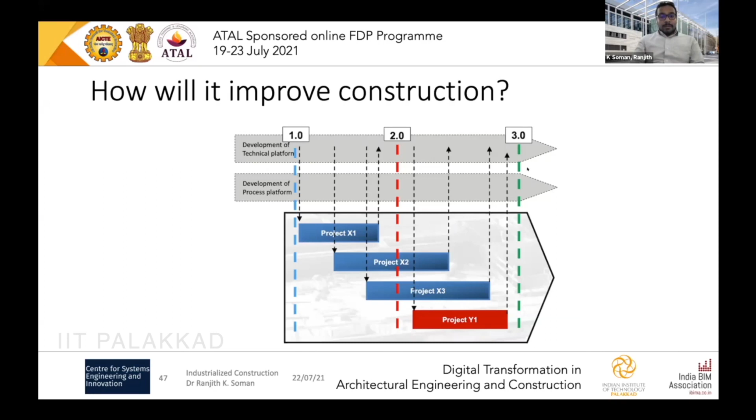Now going on to almost the last part of the presentation, which is around digital configurators. So we now know that there is a customized product that we need, there are platforms and components that come together, and there are processes to deliver it. But how do we achieve it? That's where digital comes in. Customers would be able to customize their product within a certain limitation, of course, and that would be transferred into manufacturing to deliver it.

So examples, you could see them out there. In Nike shoes, you could actually customize the colors. If you are ordering a computer, you could customize the components inside that computer, how much RAM you need, what processor you need, within a certain specification. In cars, you could do that in terms of engine, colors, transmission, trims, etc.

And more importantly, if you're looking at an IKEA kind of setup, you could actually make a wardrobe from a lot of components that are already available, and the system checks whether that could be manufactured or not. So that's what we are looking at in digital configurators. The customer would have a particular idea about the product. It would have a solution space with different components, and each of those are manufactured and taken together. So are there many configurators like these in the digital construction space? There have been a lot of studies on configurators and digital in construction, and this is one of the latest studies.

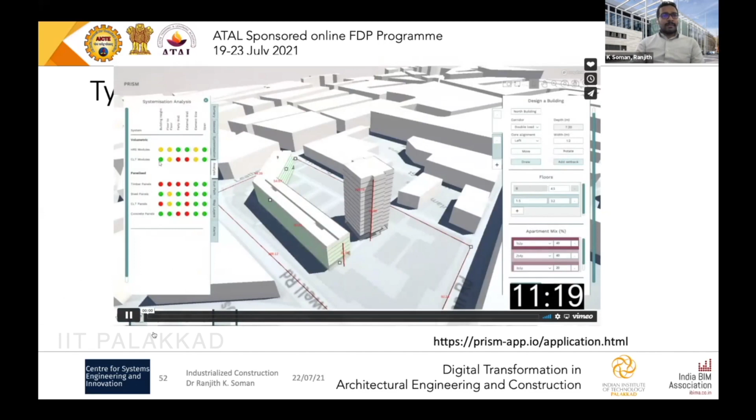First one is a planning configurator, how we plan a building in a particular space. And there is this wonderful app by Bryden Wood and the London government, it's called prism-app.io. So if you go in here, you could actually create a building in less than a minute. It's based on London. So you put in the London postcode, you get the buildings around it.

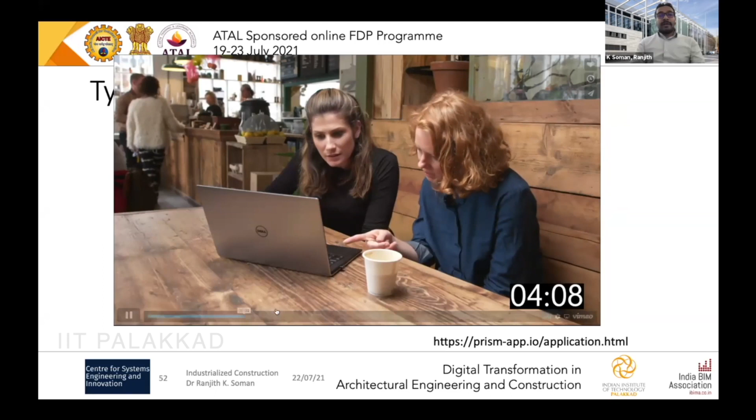Then you could choose a particular site where your building is to be manufactured, developed, and you could mark that area. Once we have that area, you could choose the type of building, the building configurations, and the outline of the buildings can come out here. Then you could even go into sectioning the rooms, what kind of rooms, etc. And it all comes into something like an intelligent building information model at the end, which is both parametric and we could run simulations on it.

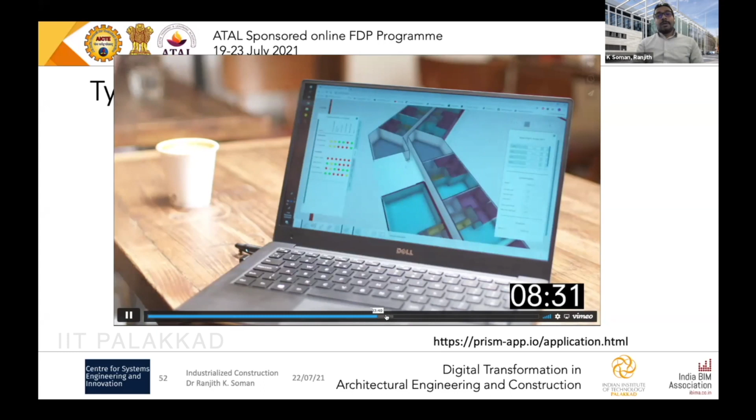We could run analysis on it, like how many commercial spaces are required, how many customized things are required, how many manufactured ones are required. Then what is the area of the building, you could think about configurations, all of this from a standard set of components so that it could be manufactured. Finally, you might get a fully written report on all the specifications, total height, which you could submit to the planning authority. And it can all happen within 1 or 2 hours instead of weeks. So that is a planning configurator.

Second one is a design configurator. So if you have a plan, what components you have to use, etc. There's a company called Project Frog, wherein they have a parts library, interfaces. Then there is an automation engine where we could look at whether things would fit together, etc. And then it can be taken to manufacturing.

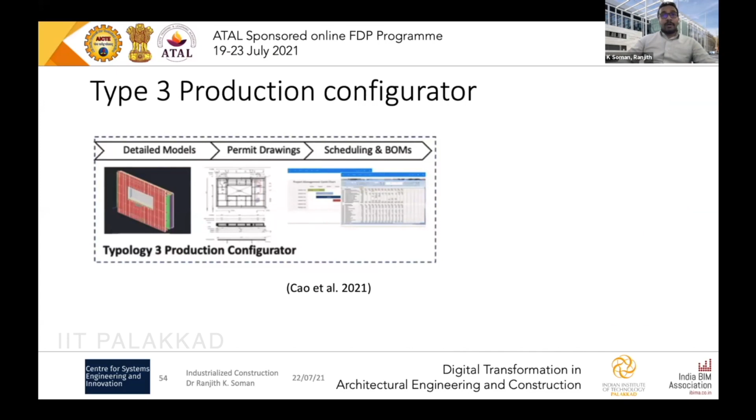Finally, you have a production configurator, which takes in this idea from the type 2 configurators and manufactures it. So this is one of the companies which does 3D printing just like that. So you have something like a CNC machine. You have a model that takes in from the type 2 product configurator and it goes into production. It prints the structure. Similarly, there are CNC machines for manufacturing timber panels, etc. in the space.

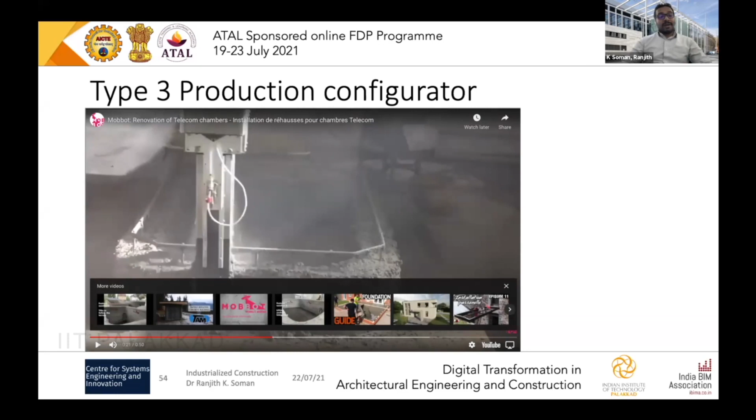Now, one of the problems that we face is these 3 configurators are fragmented, but now people are coming up with cross-phase configurators, starting with the layout into looking at the building and building components, and then all the way to production, all in one tool. This looks at a set of already available manufacturable parts with all the interfaces. So you are doing the whole design within a day or 2.

And there's a particular project going on in Switzerland called 7-Day House, in which they start with a concept on day 1 of a week, finish the design, construct, deliver, and hand over on the 7th day, a customized solution within 7 days. So those are the cross-phase configurators, and you could do simulations to understand energy, lighting, how much daylight is used.

All of those simulations can be done because we are producing an intelligent model at the start. We could put a sun path on this and understand the lighting inside. We could look at the ambient temperature and how we can optimize it with materials. All of these things could be calculated, and simulations can be run within a short time with these digital configurators. Once it is manufactured, we could also track the deliveries for planning, and there is already research on digital tools for that, integrated with Navisworks Manage.

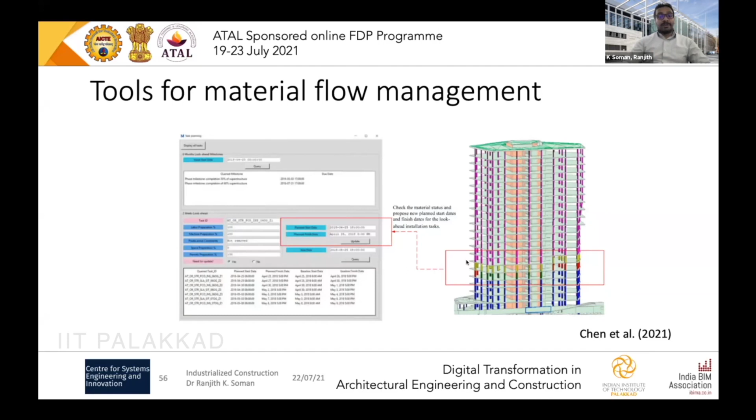So with that, I come to the conclusion of this presentation. So what we are getting is increased efficiency, faster delivery, better quality production, sustainable construction, and continuous improvement with industrialized construction. There's a little bit of losing of customizability to a particular extent, but still, from the Lego example, we could see that with enough technical systems and interfaces available, we could come up with unique projects or unique structures, with faster delivery times and better productivity, which is lacking currently in the construction sector.

For that, we need standardization, interoperable platform development, long-term supply chain relations, and more than everything, a change in mindset. With that, I conclude my presentation, and I think I'm good with time and open for questions.

Yes, Ranjith, this is Senthil. Again, thank you, it's very informative. And I have got one question. In countries like India, with limited logistics infrastructure, how suitable is this modular construction going to be? Will it increase the time taken? One of the advantages that we claim is it'll reduce the time, right? I mean, the components are going to be assembled at site.